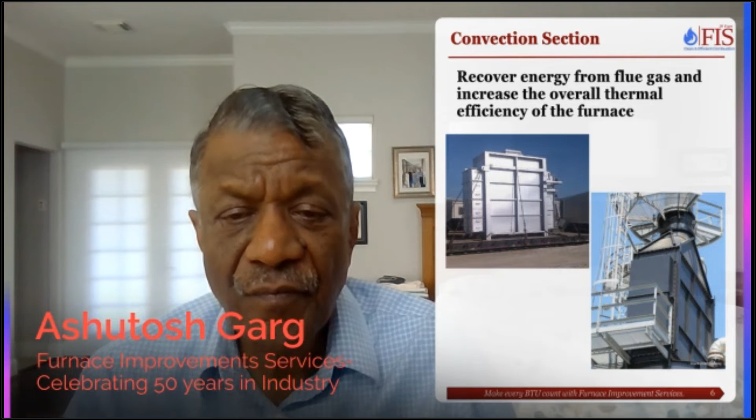Most of the projects which our company has done in past 25 years have been focused on convection sections, because convection sections can be easily upgraded. Radiant sections cannot be upgraded easily, but convection sections, you can put a larger convection section instead of your existing one. We have been able to increase the capacity of fired heaters and improve the efficiency of fired heaters just by focusing on convection section alone. So that's why convection section is important.

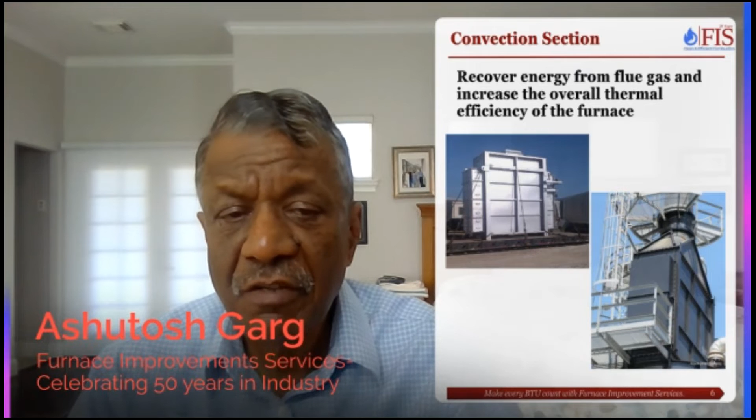So let's talk about convection sections. In the following slides, I'm going to show you a number of heater configurations, and I want you to focus on convection sections in these heaters.

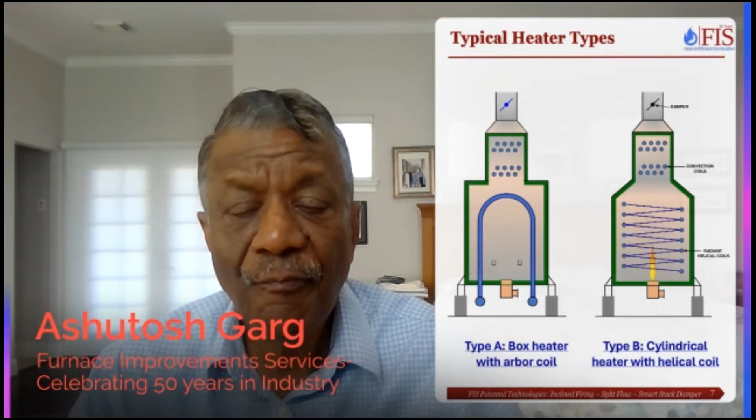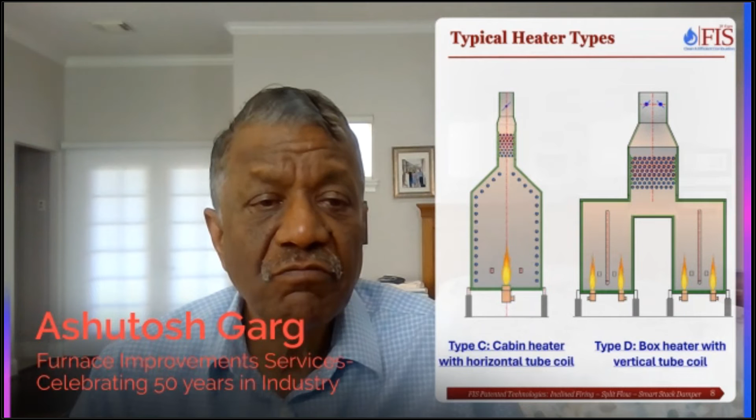This is a box type heater with arbor coils, or vertical cylindrical heater with helical radiant coils. This is cabin heater with horizontal tube coils. This one is vertical tube double fired heater with convection section. This is a vertical cylindrical heater, one of the most common heater configurations. And the second one is a box heater, also very common, with horizontal tubes.

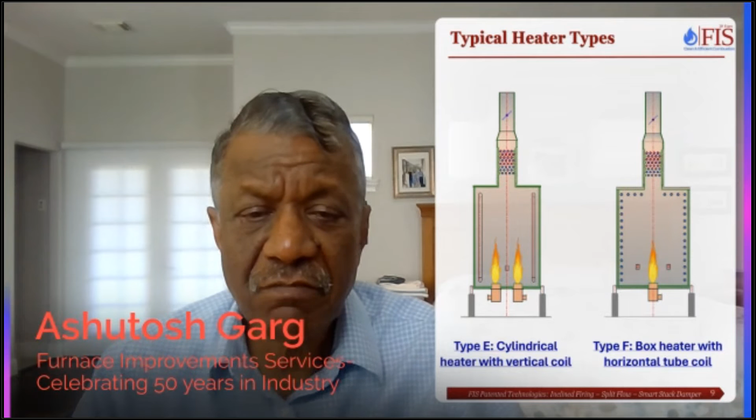These are 6 configurations which are covered in API 560. So we are just talking over here.

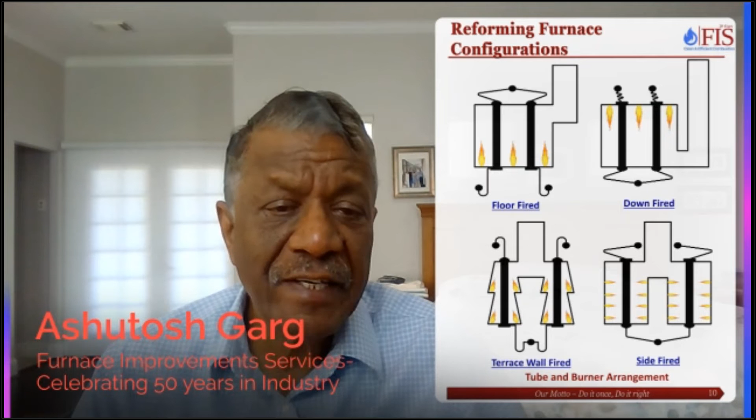Now let's come to steam methane reformers, used for ammonia plants, hydrogen plants, methanol plants, and I'm showing you 4 configurations of radiant sections: floor fired, down fired, terrace wall fired, and side fired. And look at the convection sections in these heaters. It's not shown explicitly, but you can imagine it over there.

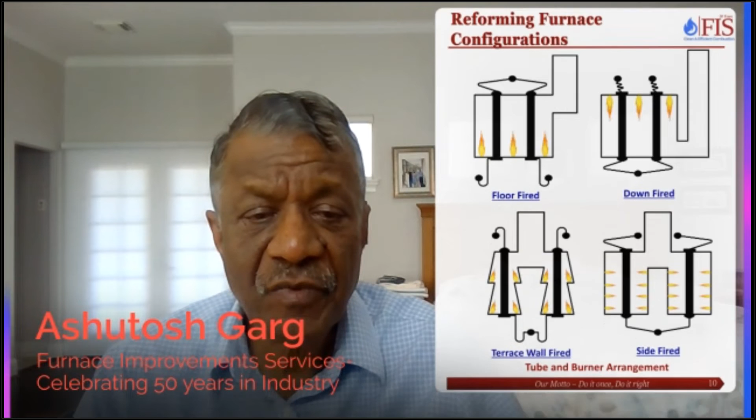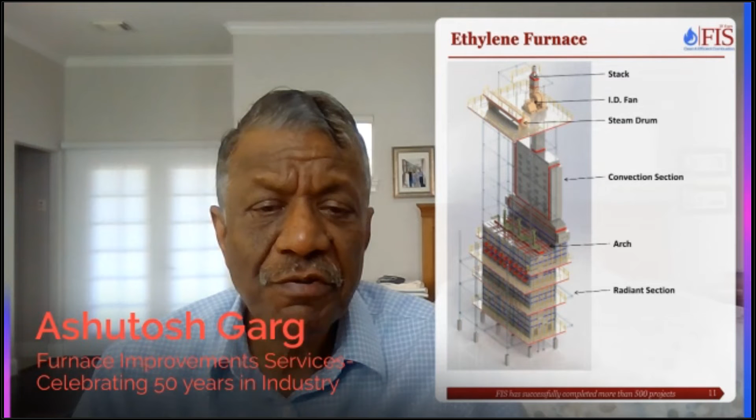So what do you see in all these heaters? If you look at the convection section, no matter what is the radiant configuration, no matter what is the reformer configuration, convection section in all these heaters looks the same. There is only one configuration of convection section which is used in fired heaters.

So from that point of view, convection section design or configuration is much, much simpler. We don't have to worry about designing a cylindrical convection section, or a vertical tube convection section. So all the convection sections have almost identical configuration.

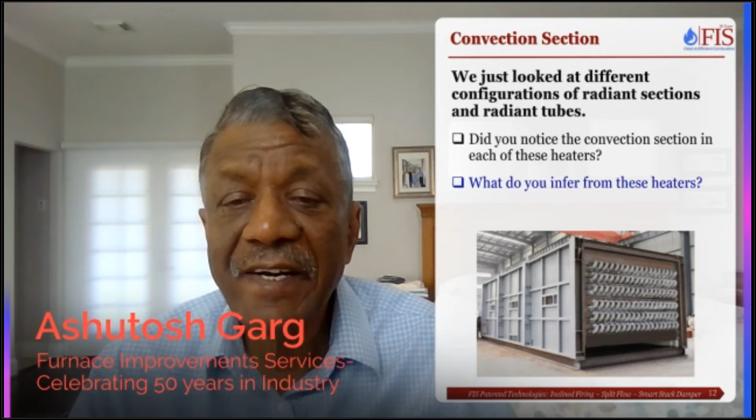So let's look at the configurations of convection section. It's very standard. We have the fluid flowing horizontally in tubes and flowing downwards. The flue gas is flowing upwards, so it's a cross flow arrangement. And tubes are laid out in triangular pitch. This is a little different from boilers, where the tubes are laid out in square pitch. Triangular pitch gives about 15% better heat transfer, so that's why we use triangular pitch.

And the flue gas flow area is rectangular, not circular, not anything else but rectangular. So length, width and height are the three important dimensions of convection section.

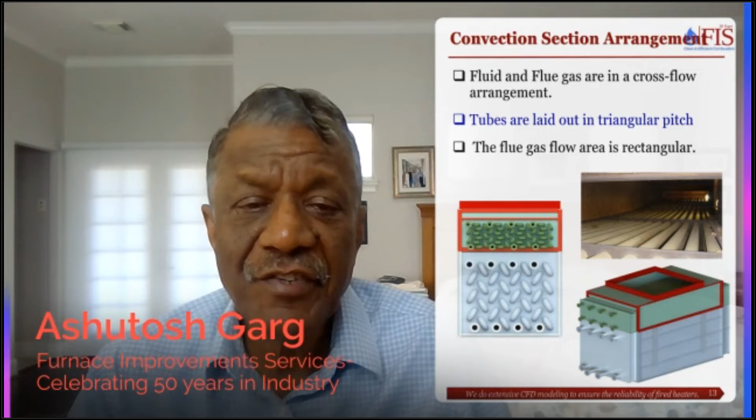So let's talk about the function of convection section. What is the flue gas temperature leaving the radiant section? I've given you choices over here, and if you can tell me what is the temperature of the flue gas leaving the radiant section in your heaters.

Most of the time you will see it's generally around 1600 to 2000 - 2000 in high temperature steam methane reformers, cracking heaters, 1600 plus or minus 200 degrees in refinery heaters. That's typically the temperature of flue gas leaving the radiant section. At 400, 800, 1200, the radiant section heat transfer is uneconomical, so that's one reason we maintain about 1600, 1400, 2200 temperature ranges in the radiant section, or the flue gas temperature entering the convection section.

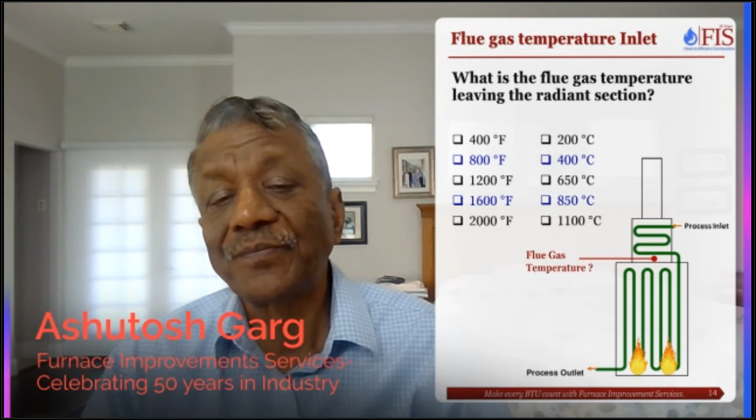Now you will ask me, what about the outlet temperature? The outlet temperature is depending on the fluid inlet temperature, which is a little different. So if you remember the basic laws of heat transfer, heat always flows from higher temperature to lower temperature. We need a temperature differential. So the temperature of the flue gas leaving the convection section is dependent on the temperature of fluid entering the convection section.

Depending on what temperature of fluid is entering your fired heater, you can determine the flue gas temperature leaving the convection section. If your temperature is 200 degrees, we can talk about that. If you have a reformer heater, your temperature is 500 degrees, then it will be different. So flue gas heat transfer needs a driving force, and heat transfer is always taken from flue gas to fluids in fired heaters.

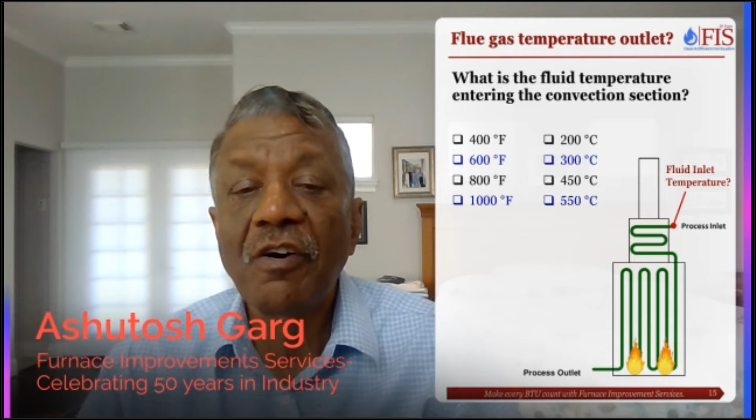That's the reason we need to focus on the fluid temperature entering the convection section.

Let's talk about this parameter, flue gas temperature approach. This is the most important parameter which determines the size of the convection section. If you talk about the radiant section, average radiant heat flux is the most important parameter there, which determines the size of the heater and cost of the heater. Similarly, in convection sections, it is the flue gas temperature approach.

I can have a 400-degree approach and my convection section will be half the size. I can have a 50-degree approach and my convection section will be 3 times the size of the previous one. So it's the approach which is very, very important in the convection section.

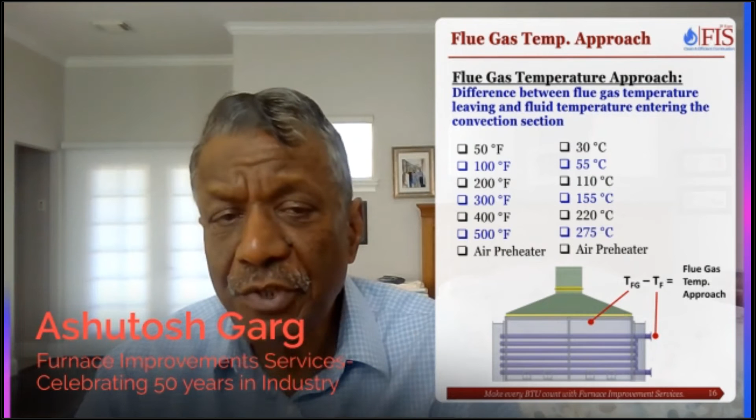Another benefit of convection section is, in radiant sections most of the time you will see we only have single streams - we only feed the process. But in convection sections, we can have multiple streams to recover the heat. We can bring in boiler feed water, we can do steam generation, we can even have an air preheater on top of the convection section. So there are a number of options available in convection section.

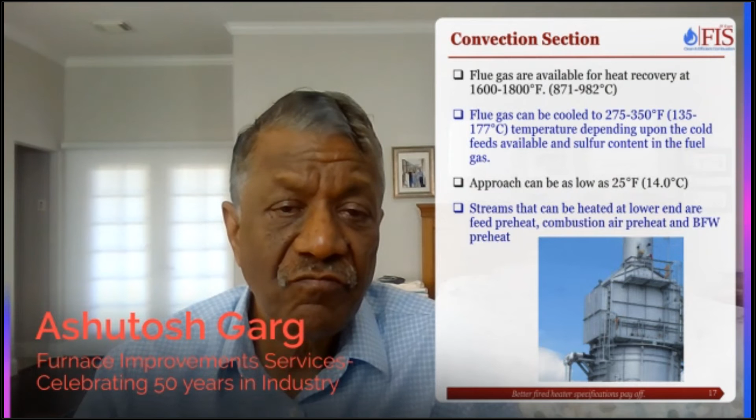So let's talk about the convection section. Flue gas inlet temperatures, I'm talking mostly about refinery heaters, is around 1600 to 1800, and we can cool the flue gases all the way to 275 to 350 in convection sections. Generally it doesn't happen - we are bound by the approach and other things. And we can go for an approach as low as 25 degrees Fahrenheit. By doing that, we can maximize the efficiency of fired heaters.

We can heat feed if we have any cold feed. We can use combustion air for preheating. We can use boiler feed water for preheating. So a number of streams can be preheated in the convection section and the efficiency of the heater can be maximized.

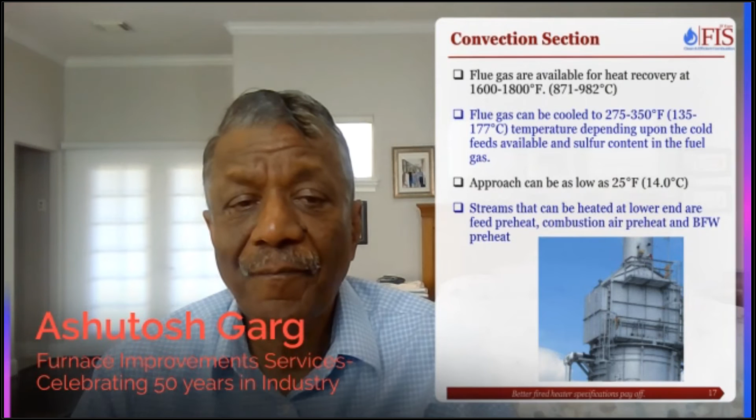Let's look at the components or construction of convection sections. Convection sections are mostly fabricated in shops in modules. I mean, these days even radiant sections are being fabricated in modules in shops to save time and save the erection cost. But convection sections definitely can be modularized very, very easily.

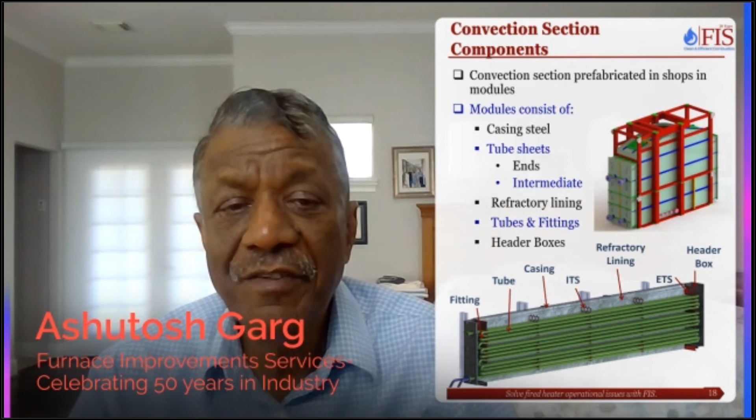Convection section consists of casing - steel casing, tube sheets. I will show you all these things: refractory lining, tube fittings, and header boxes. These are the major components of a convection section. This is a longitudinal view of the convection section. You can see different streams over here.

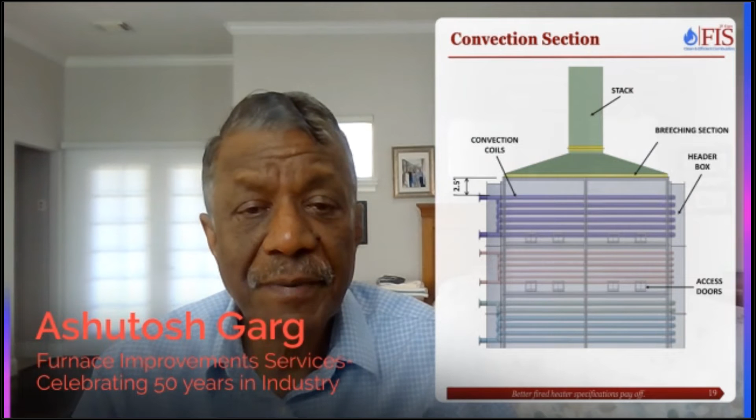This is showing you the details of header boxes. Header boxes are used for housing the return bends. You want to house the return bends in a header box so that the flue gas doesn't bypass.

50 years ago, or maybe even 75 or 100 years ago, convection sections did not used to have any header boxes. The bends would be inside the flue gas flow path. But now we have found that by adding header boxes, we can isolate and have better flue gas distribution.

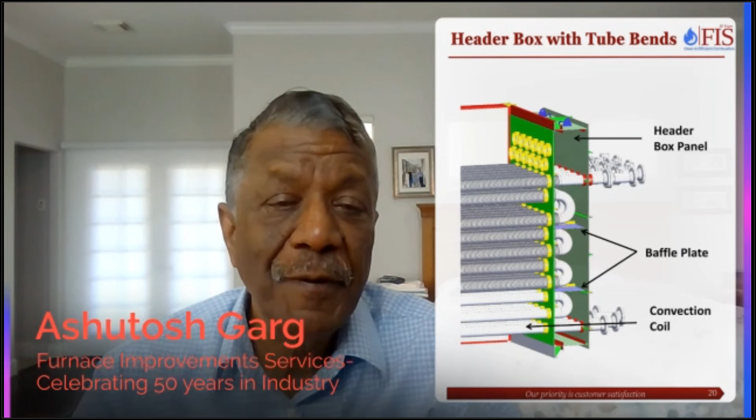So it shows the coil inlets, coil outlets, header box panel. Notice the baffle plate - sometimes in long convection sections we put these baffle plates to prevent flue gas bypassing. That is done and is also specified by API 560.

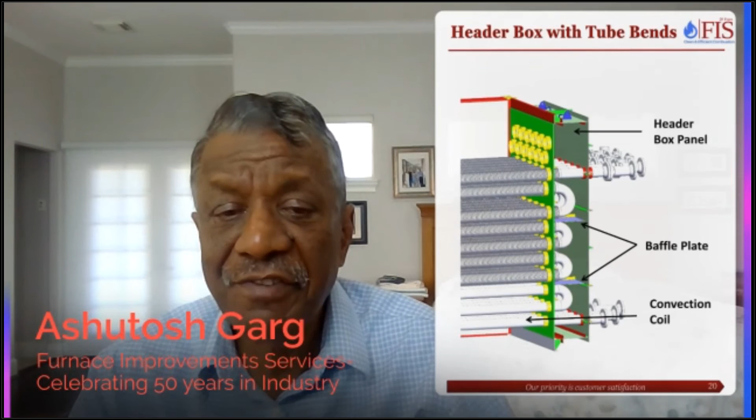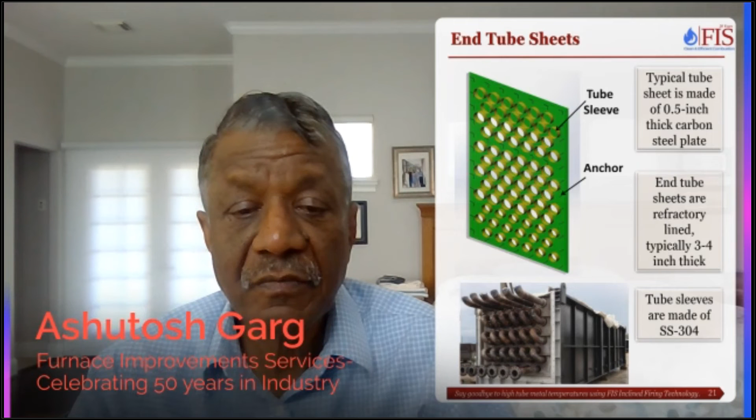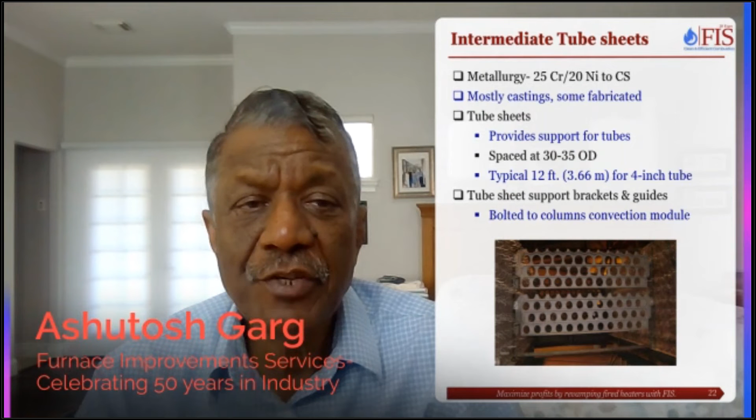Then these horizontal tubes require intermediate tube sheets every 35 OD, about anywhere between 12 feet to 20 feet depending on the tube size. So these intermediate tube sheet castings are made out of high chrome nickel alloys. Depending on the temperature, sometimes we even do 50 chrome 50 nickel for fuel oil fired heaters, and they are used for supporting the tubes. These tube sheets are bolted to the columns so that they can take the weight.

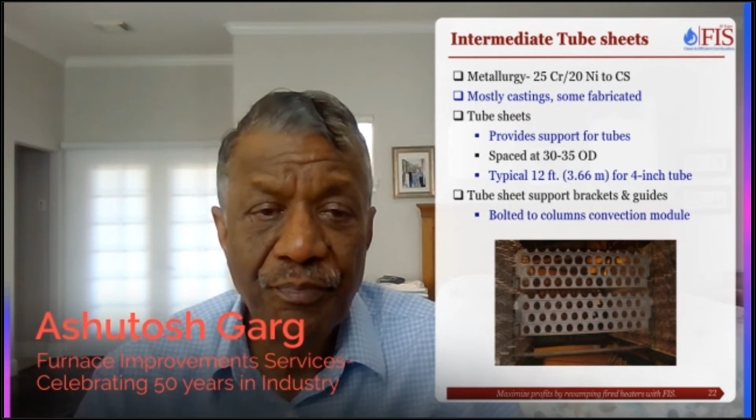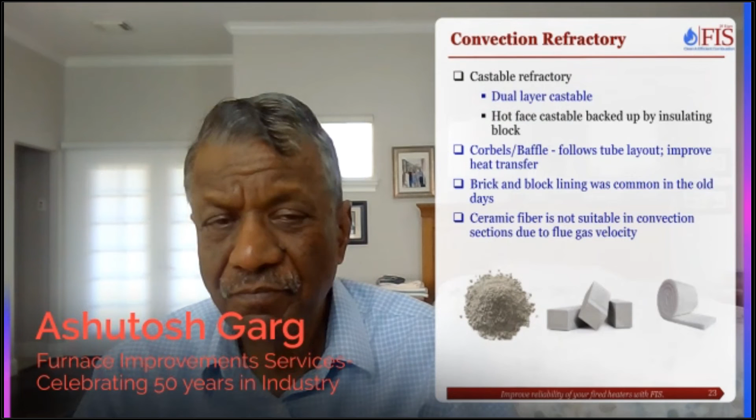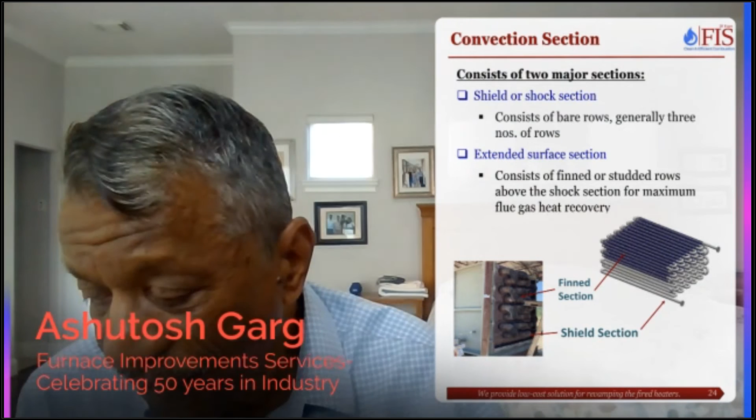So let's talk about convection sections of modern days. We have two sections: the shield section, which has bare rows, generally 3 number of bare rows, and then we have extended surfaces, which could be fin tubes, studded tubes, etc.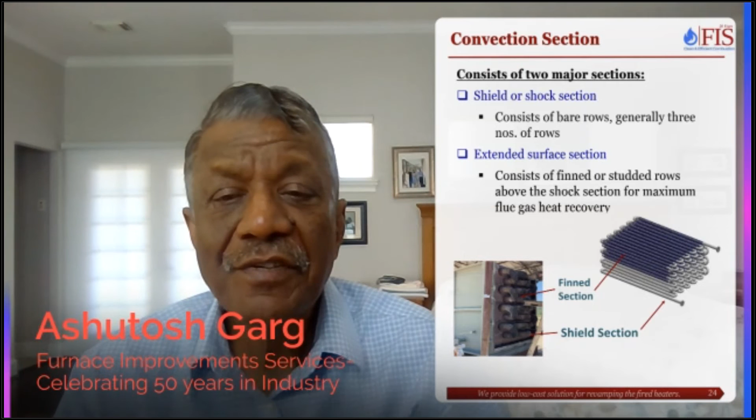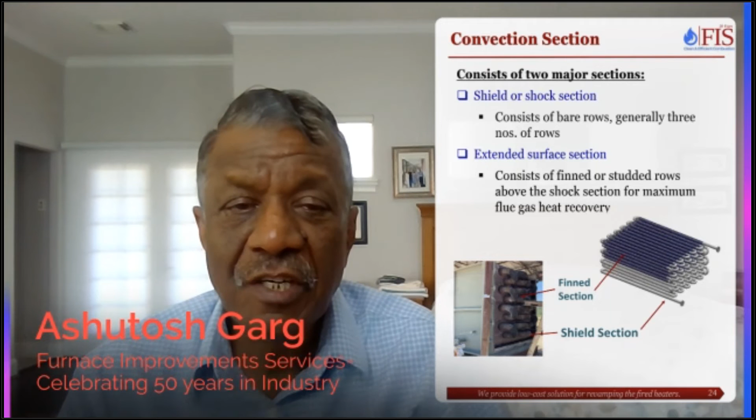Before the invention of extended surfaces, convection sections used to have bare tubes, all bare tubes. So the heaters which were built about 75 or 90 or 100 years ago used to have bare tubes, and some of them are still in existence - you can see they would have bare tubes.

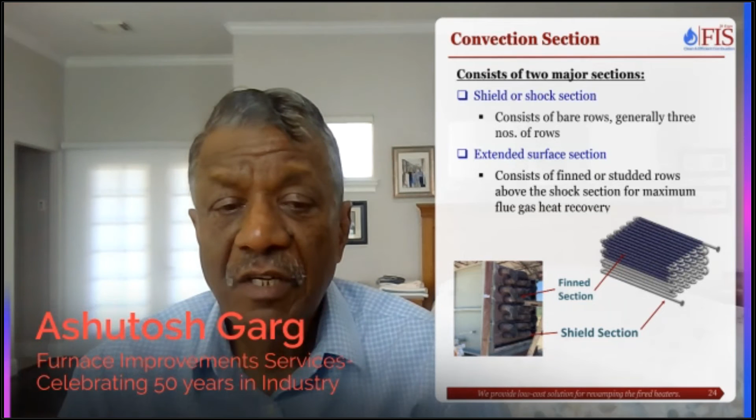Nowadays we use extended surfaces, we'll talk more about it, but we want to talk about the importance of the shield section. Some people call it a shock section also, and the reason we call it a shock is because it is receiving heat both by radiant and convective means. It is kind of protecting or shielding the convection section or extended surface tubes from excessive radiant heat transfer. So that is why the name is shield, or you can call it shock - both names are equally prevalent.

So if you look at the bottom 3 rows of the convection section, the first row receives about 70% of the radiant heat transfer, the second row receives 26%, and the third row receives 4%. A lot of heater vendors in the 1960s, 70s, 80s would provide only 2 rows because the third row was receiving only 4% radiant heat transfer. But API 560 came into existence and they insisted on having 3 rows of shield tubes.

And the way shield tube heat transfer is done is in two steps. First, the shield section is considered a part of the radiant section, and we find out how much heat is being transferred to the shield section, so we calculate that duty. Then we do the convective heat transfer calculations and radiative heat transfer calculations due to flue gas velocity and presence of radiation transfer because of walls or flue gas present between the tubes. So we do two calculations, two steps: first consider them as part of the radiant section, and second consider them as part of the convection section, and the total gets added.

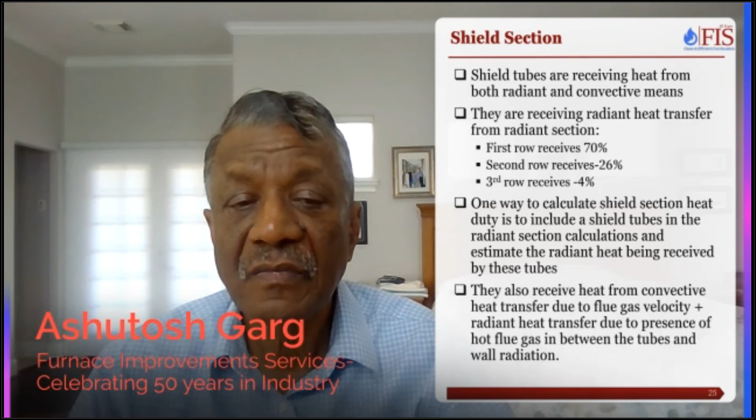So, couple of things I want to talk about the evolution, and one reason could be that I've been in the industry for a very long time, so I've seen lots and lots of fired heaters. As I said, convection section used to be all bare tubes.

Then most of the developments in fired heaters have taken place through the boiler industry. First we have gilled tubes, gill fins. These were shrink fit, very expensive square tubes. I have seen it only in one heater. Then we came up with tension wound fins, and longitudinal design of fins.

Now the industry has settled on fins which are welded, and welded fins provide the best heat transfer efficiency between the tube and the fin. So the industry has developed over the last 50, 70 years, and we have kind of finalized on these configurations now.

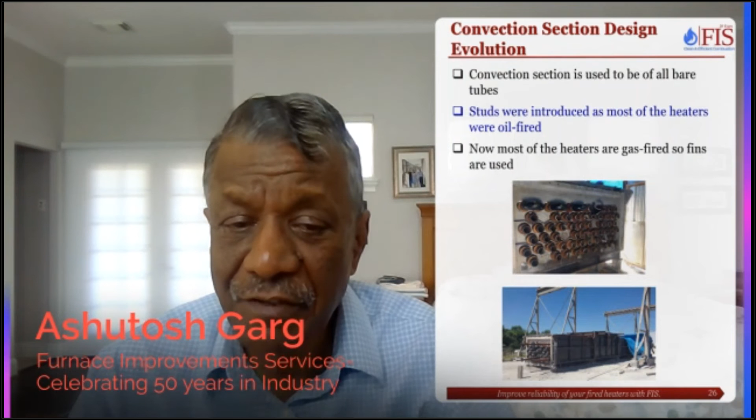So in the convection section, the heat transfer is by convective and radiative means. Convection means movement of flue gas molecules, velocity. The radiant section is dominant in the hot section of the convection up to about 1400 degrees. So one of the things we want to achieve in the convection section is flue gas mass velocity, or flue gas velocity.

This velocity has to balance itself with the pressure drop available. In natural draft furnaces, the stack is producing the draft, so we keep lower velocity, anywhere between 0.3 to 0.6. Whereas in steam methane reformers and cracking furnaces, we use an induced draft fan to create draft, and because of that we're able to use higher velocities.

If you look at the convection section of steam methane reformers or cracking furnaces, those are huge. In fact, they are absorbing almost 45% of the total heat duty in those furnaces, as compared to 30% in refining furnaces, refinery furnaces.

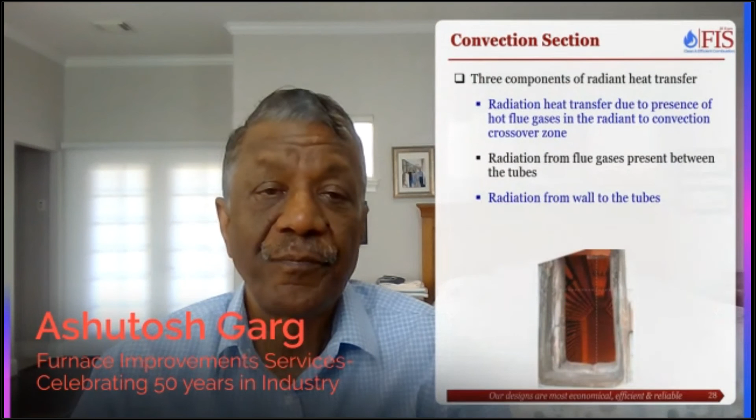So when we talk about radiation, there are three portions. Hot flue gases in the crossover duct from radiant to convection is radiating - that's one component we try to calculate. Second component is radiation due to flue gas present between the tubes. And the third component is radiation from wall to the tubes.

Generally in the fin section, radiant section, this radiant component can be neglected for quick calculations. Unless we want to do exact calculations, it can be neglected.

So this is a question for you: what percentage of radiant heat transfer takes place in the convection section? If you can make a guess - the answer is 15%. In radiant sections, 15% of the heat is transferred by convective means. In convection section, 15% of the heat is transferred by radiation means.

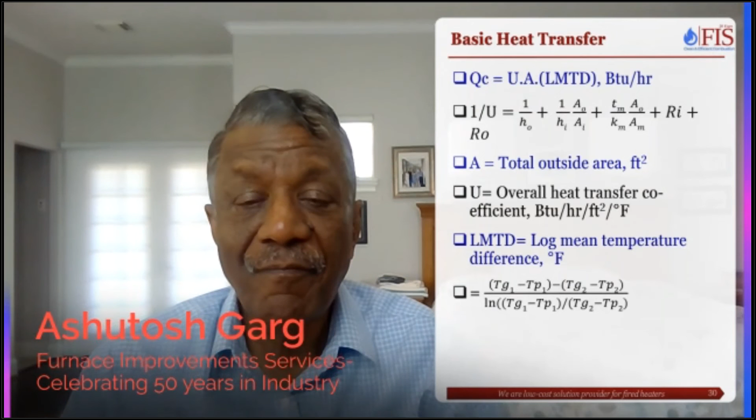Convection section design is a lot simpler. If you have done a design of radiant sections, it is hit and trial. Whereas convection section design is much simpler - it is just like any heat exchanger, and all we need to do is calculate the overall heat transfer coefficient.

We calculate the overall heat transfer coefficient, the area of tube, and the log mean temperature difference. Once we know these things, we can find out how much duty can be transferred in the convection section. So it's much simpler - we calculate the inside heat transfer coefficient, the outside heat transfer coefficient, the wall resistance, inside fouling, outside fouling, add all those, and we get the overall heat transfer coefficient.

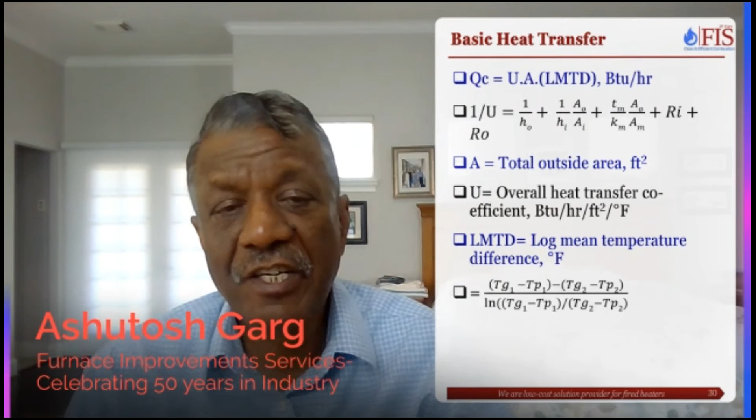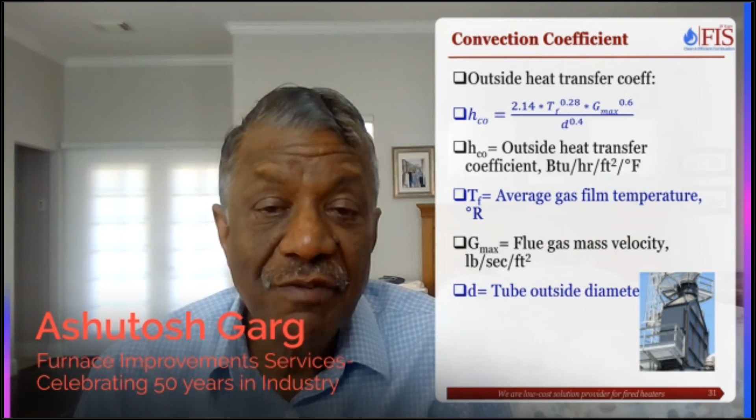So outside heat transfer coefficient - a lot of work has been done, but the basic equation is called the Monrad equation. This equation was developed, my guess is in 1932, when William Monrad developed it. And it's still very close. I mean, imagine what they did almost 100 years ago, and even today, with all the computers, we are still using the same equation.

The convective heat transfer coefficient is based on average gas film temperature, flue gas velocity, and tube diameter - 3 parameters.

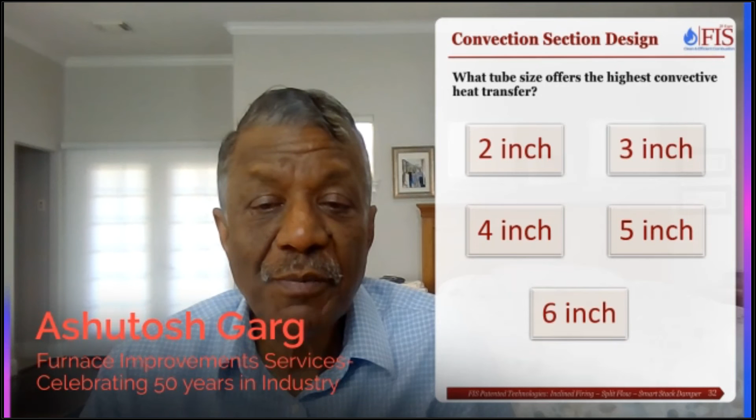So, what tube size offers the highest convective heat transfer? If you notice the equation, you can see the heat transfer coefficient is inversely proportional to tube diameter. As the tube diameter goes up, the heat transfer coefficient goes down. So a 2-inch tube will conduct better heat transfer than a 4-inch tube, and a 4-inch tube will do better heat transfer than a 6-inch tube.

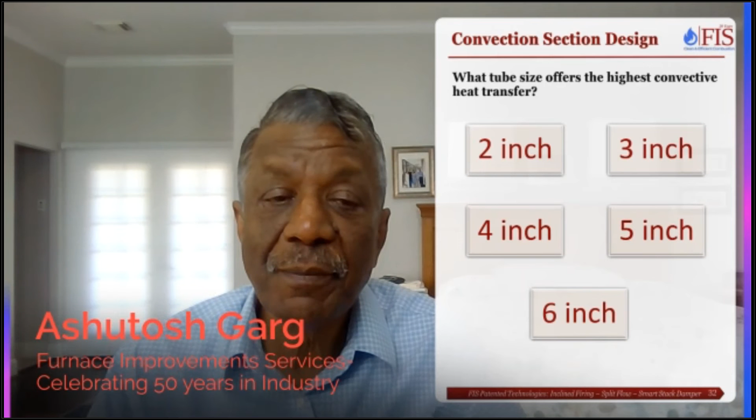So 2 parameters: higher flue gas mass velocity will increase the coefficient, but we have to balance flue gas pressure drop with the draft available. The second thing is tube diameter. We can use smaller tubes, but they have more pressure drop, so you will need more passes, and smaller tubes require more intermediate tube supports. So this is where optimization sets in - do you want to use larger tubes to minimize the number of passes and minimize intermediate tube supports?

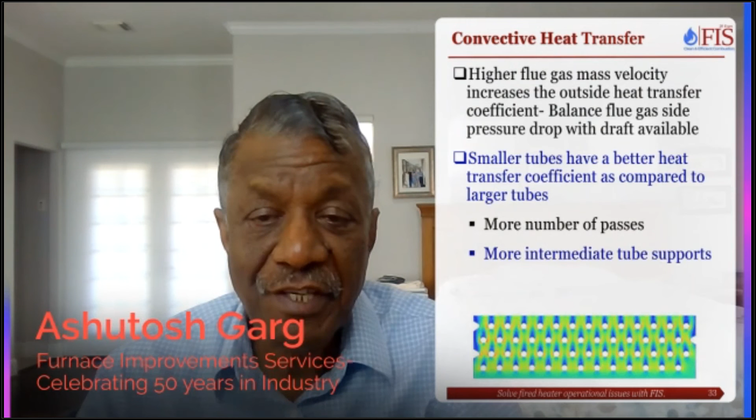And that's where we come in to help you out. If you are looking for optimization in your convection section, let us know and we can help you optimize the convection section and maximize the efficiency.

So the question comes, why use fins actually? In fired heaters, it is the flue gas side which is controlling the heat transfer surface or heat transfer coefficient, whether it's in the radiant section or the convection section. Inside heat transfer coefficient could be anywhere between 100 to as high as 1000. Outside heat transfer coefficient could be between 5 to 10. So if you look at the two, 5 versus 500, the overall heat transfer coefficient will be closer to 5. So it's the outside heat transfer coefficient which is controlling, and that is why by increasing the outside heat transfer surface, we are able to recover more heat. That's why we use fin tubes - because there is so much difference between the inside and outside heat transfer coefficient.

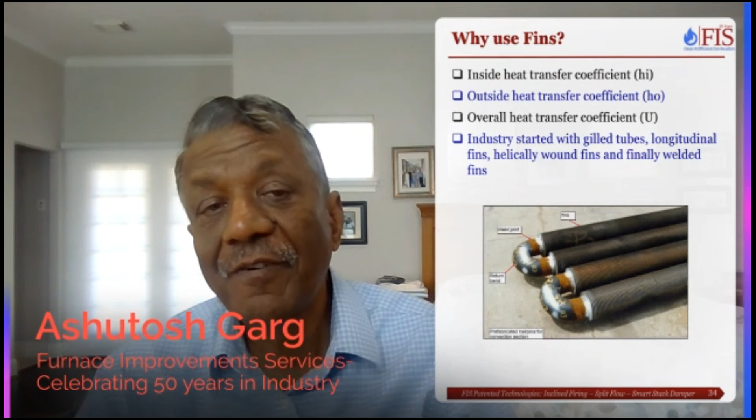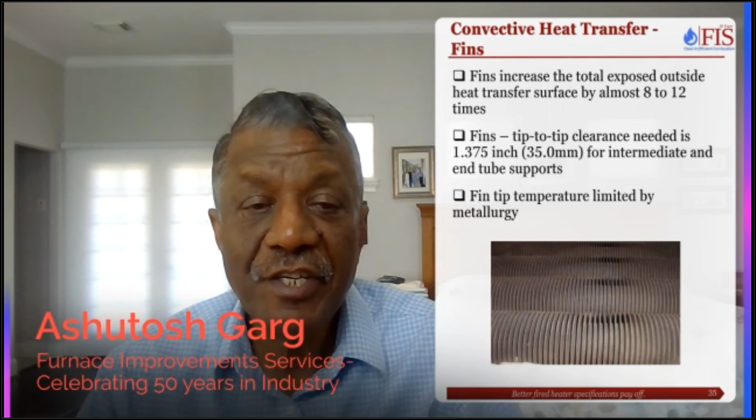So once we put fins, we can increase the surface of heat transfer by almost 8 to 12 times. We do need a fin tip-to-tip clearance of about 1.375 inch or 35 millimeter for intermediate and end tube supports, just to provide the ligament thickness. And fin tip temperatures are limited by the metallurgy - tip temperature is the hottest point in the whole heat transfer.

There are different types of extended surfaces. Fins are the new ones. Studs have been there for a long time - studs are very sturdy, mostly used for heavy oil firing. Today, because of pollution reasons, nobody is doing oil firing except a few refineries, and even those are using fin tubes in their convection sections. But 30 years ago, 50 years ago, I remember in India when I was there, we would be using studs in almost all fired heaters. Fins are much cheaper and have the benefit of lower pressure drop.

Similarly, there are two types of fins: serrated fins and solid fins. Serrated fins have high heat transfer, lower pressure drop, and are easy to clean, but the oil companies have always preferred solid fins - the end users have always preferred solid fins, so solid fins are the standard in industry. Another reason is solid fins can be made out of thick material, as high as 0.2 inch or so, and once you use thick material, you get better efficiencies.

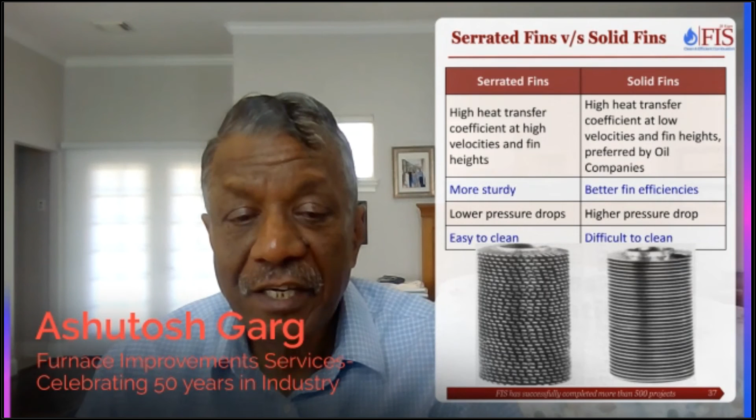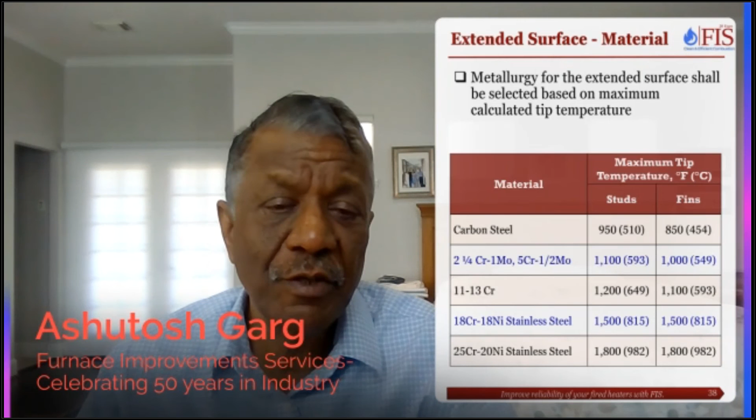So solid fins are the de facto standard for the refining industry. When we talk about fin tube metallurgy, carbon steel is most common and can be used up to a maximum fin tip temperature of 850 degrees F for fins and 950 degrees F for studs. Then we have alloy steel, 2-1/4 chrome is also very common material, and 18-8. 25-20 or SS310 has been used very, very rarely - in fact it may be better to use bare tubes when we come to these fins.

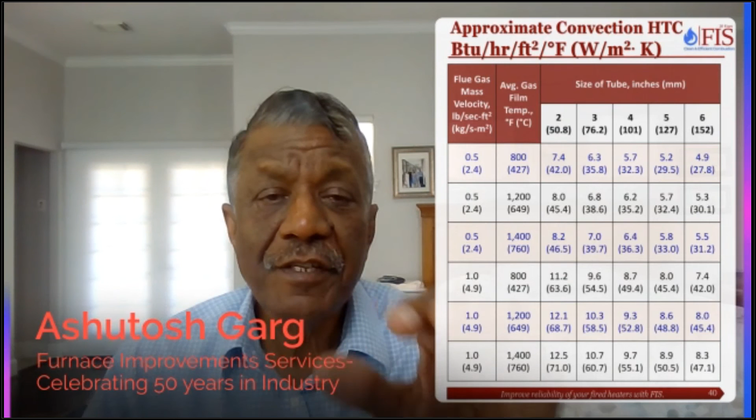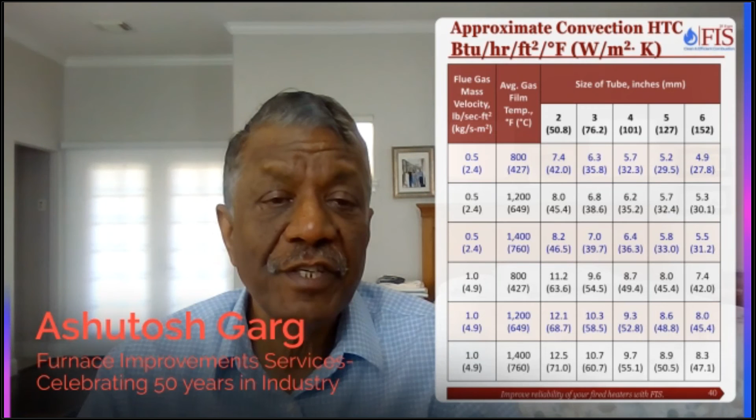So this is an approximate convection section coefficient chart. If you ever need to understand what type of coefficient should be there, depending on the flue gas mass velocity and the average gas film temperature, these are the different tube sizes you can see. As you can see, from 2 inch to 6 inch, for everything being the same, the heat transfer coefficient goes down. This is at 0.5, for natural draft - this could be taken for induced draft. And you can see when we use higher flue gas mass velocity, the coefficient goes higher.

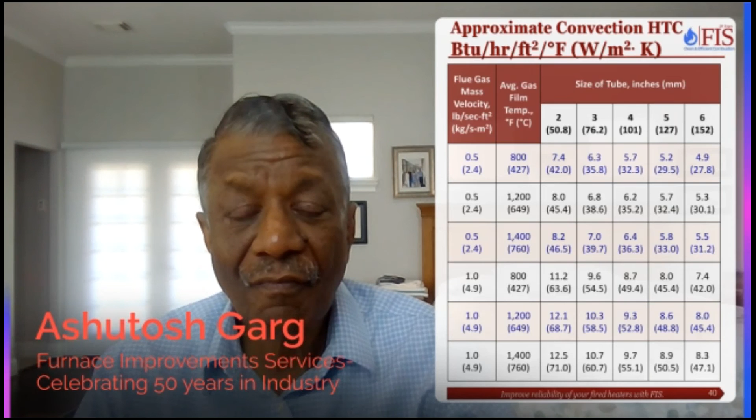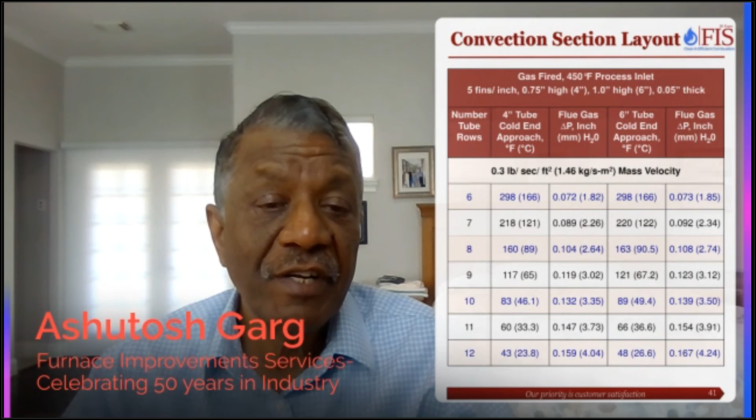So this is a quick calculation our team has done on natural draft furnaces, 0.3 mass velocity, 0.3 pounds per second per foot square. They have done it for 4 inch and 6 inch, and these are the number of tube rows. Typically, if you use 6 rows, you will get about 300-degree approach. If you use 8 or 9 rows, you get down to about 110, 120. If you go all the way to 12 rows deep convection sections, you can have almost like 25 degree centigrade or 50-degree approach.

So if you want to have a thumb rule, put about 10 fin rows in your convection section for quick estimating.

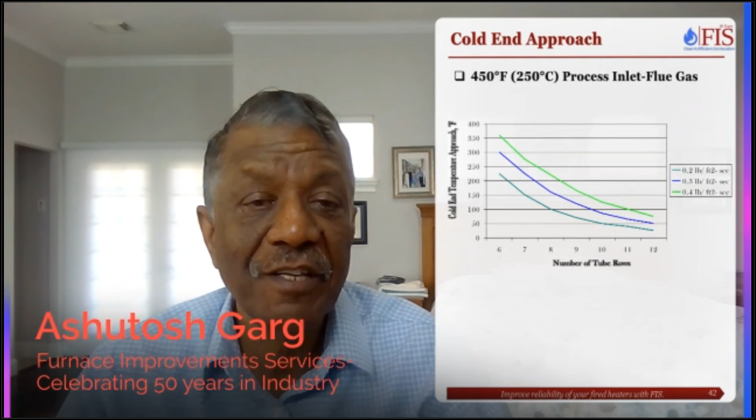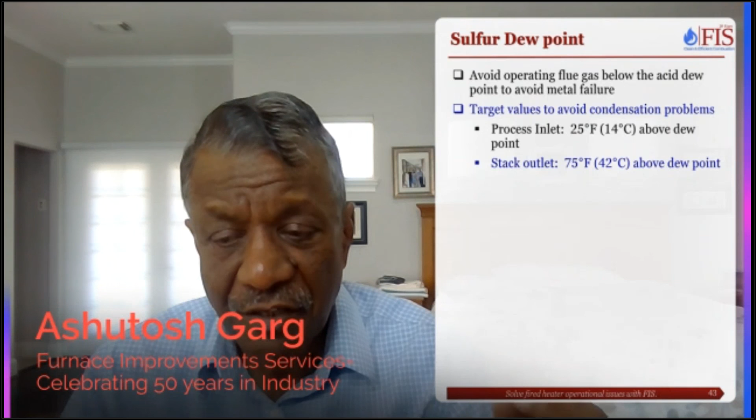Convection section design is comparatively much simpler. The only issue you have to sometimes take care of is condensation of sulfur compounds, sulfur dioxide, sulfur trioxide. So the guidelines are to keep the inlet temperature 25 degrees above the dew point and stack outlet 75 degrees above the dew point. So if you have the sulfur content, you can calculate the dew point and target these values.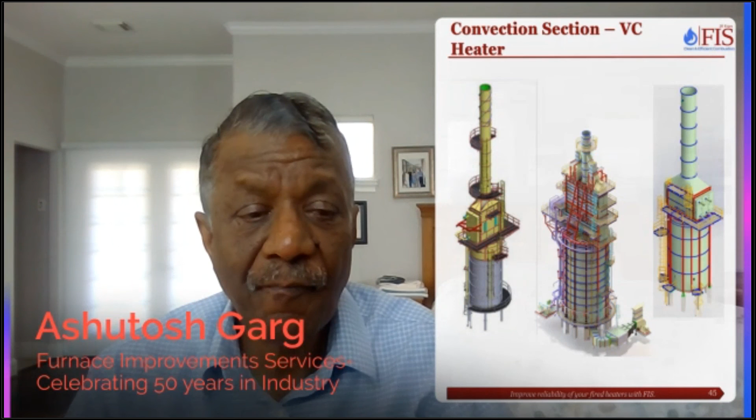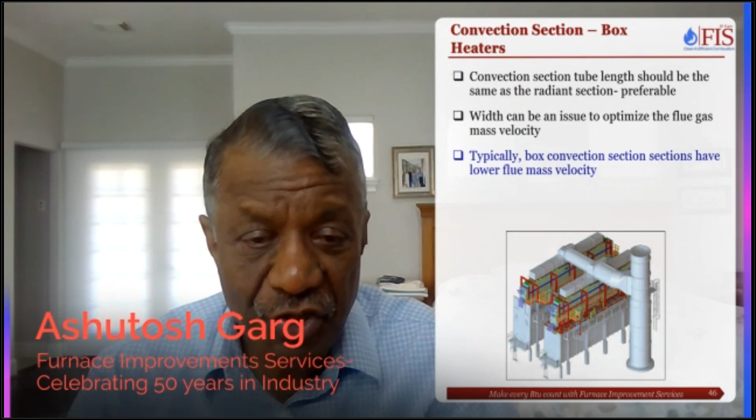In the box type of heaters, you can have the convection section tubes almost at the same length as the radiant section, and then you optimize the width. Most of these convection sections are very narrow in box heaters because we want to get the right flue gas mass velocity, and since we are going with full length convection sections, the width gets limited.

And you can see over here, all these convection sections which we have revamped from our projects are much more narrower.

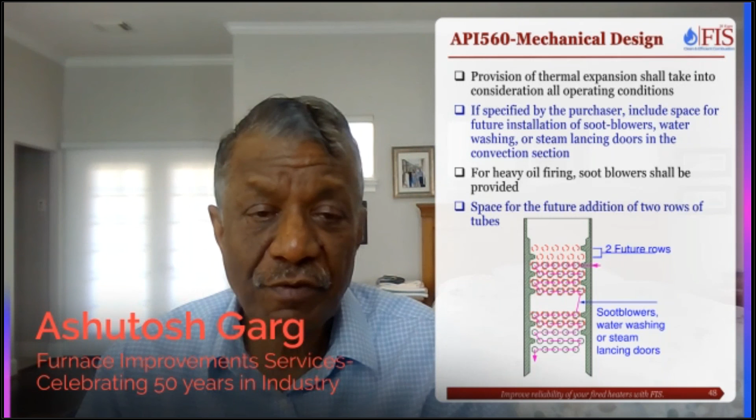These are some of the convection section recommendations we have assembled, my team has put together. 2 future rows provision is another one, 3 basic bare rows, then space for soot blowers or water washing or steam lancing doors, that is given. So corbels, these are the baffles, corbels which you need to provide, including for the future rows.

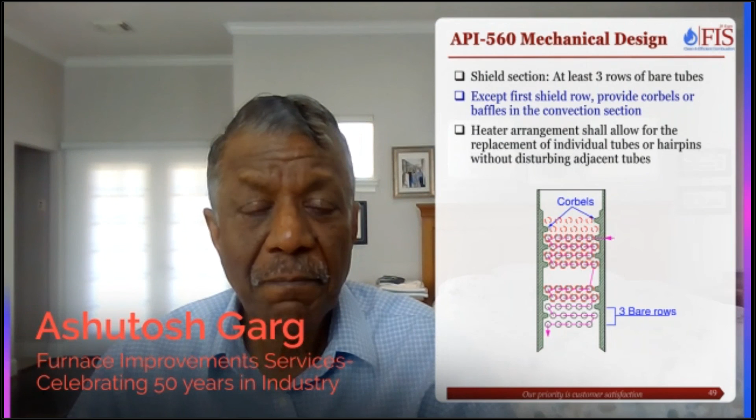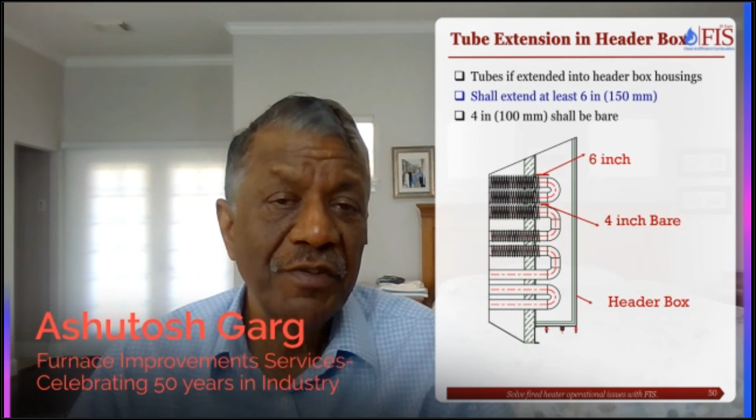These are some details of the header boxes, that the tube should project at least 6 inches and the finned portion should be, or 4 inches portion should be bare and 2 inches should be fins. You can see the header boxes over here.

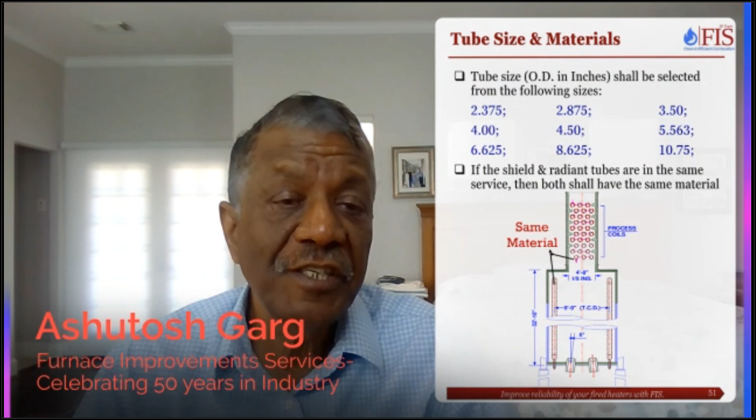So these are the common tube sizes which are used in convection section, although we normally don't use 2-inch and 10-inch, but if required, we can use it. Industry guideline says the shield section tubes and radiant section tubes should have the same material. And this is again segmented fins or solid fins.

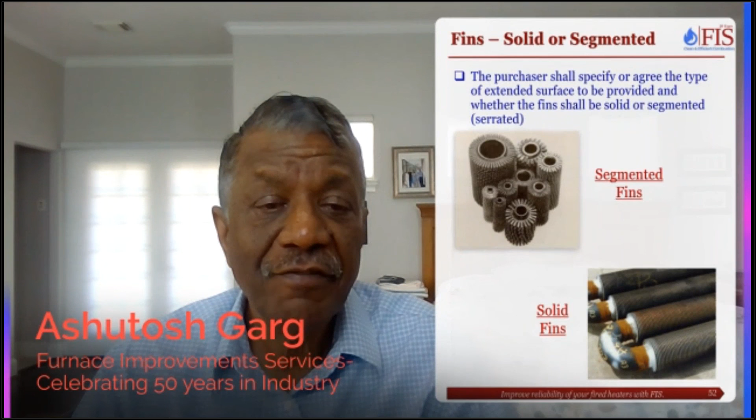Fouling, we can use soot blowers in most of the heaters.